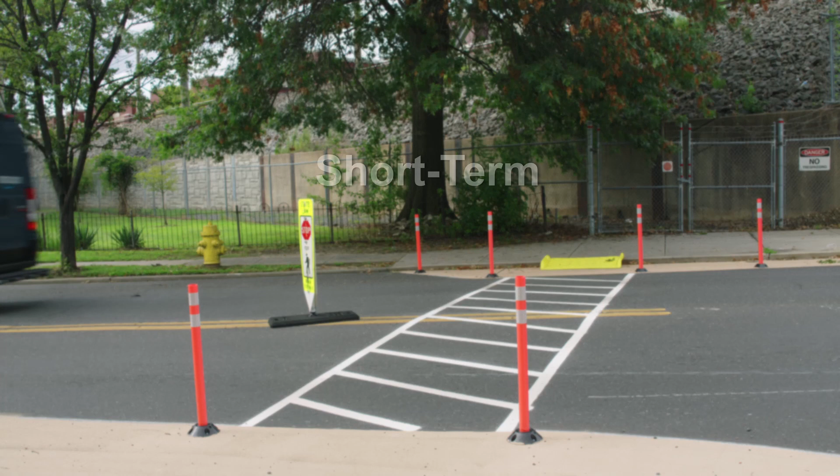In New Jersey, improving safety on our roadways is a top priority. To help reach safety goals, communities all over the state have been implementing temporary demonstration projects. Demonstration projects are short-term, low-cost, temporary solutions to reimagine roadway and other public spaces to improve safety and quality of life for all users. They're a way to involve and engage the public in the road design process as a way of gaining support through open dialogue. Demonstration projects, which are also referred to as tactical urbanism, pop-up projects, or quick build projects, allow public agencies, community partners, residents, and visitors to test and implement a shared vision for improving public spaces. This try it before you buy it approach is low risk and allows organizers and communities to test assumptions and refine designs before committing to permanent changes or large financial investments.

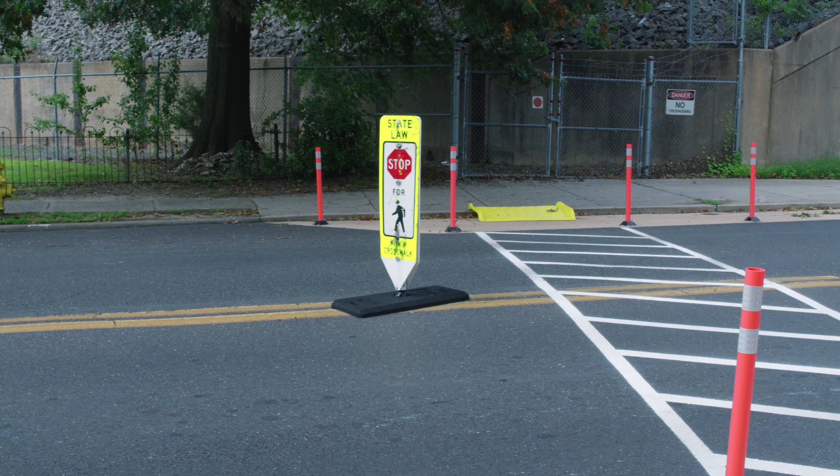Some examples of demonstration projects you may see around New Jersey include temporary bike lanes, pop-up parks and seating, curb extensions, street murals and decorative crosswalks, open street events, and other innovative ideas. Projects are generally quick, flexible, scalable, adaptable, and inexpensive. With permissions in place, a pop-up bike lane can be installed in a day for the cost of a few cans of temporary paint and the help of some volunteers. Projects can include artistic elements to improve appearance and enhance visibility. Once a demonstration project is installed, it can be evaluated for potential impacts on people's behavior and comfort levels, economic impacts, impacts on traffic flow, and changes to roadway speeds. Short-term and low-cost demonstration projects provide the opportunity to capture real-world data for streets and public spaces and encourage people to work together in new ways, strengthening relationships between residents, nonprofits, local businesses, and government agencies.

Road design projects are inherently long-term and costly. A temporary demonstration project provides an opportunity to test a design with low-cost materials while bringing government leaders and community members together to demonstrate that little investment can make a big impact. Keep an eye out in your neighborhood, not only for temporary demonstration projects, but areas that might benefit from them. To start a conversation about demonstration projects, reach out to your municipality to talk about what's possible. For more information and for resources that can help you get started, please contact the New Jersey Safe Routes Resource Center.

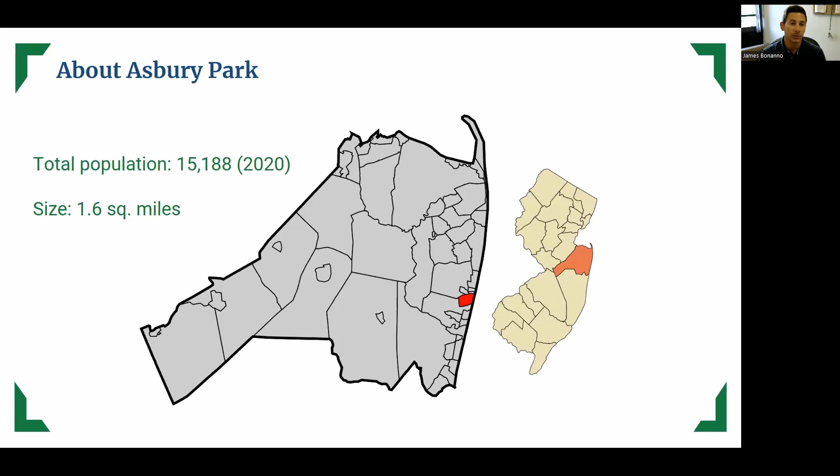We have a large bicycle network and bicycle community, people that ride to the beach, around the city, to downtown, to the waterfront, to their homes, their rentals. And we've also seen a big uptick in our new micromobility program. We recently launched a scooter share program. Next slide. So we launched Superpedestrian Link in May 2021. We have about 250 e-scooters in the city at a time; we kind of go down in the winter. And we have just over 50 geofenced parking corrals located at nearly every intersection in the city. We average around 21,000 trips per month in summer 2022.

So as you can see, on top of the bike trips, we're seeing even more scooter trips and pedestrians and cars coming around. So we have a lot of road users sharing the space and navigating it together. And in the past, we've had to kind of develop new ways for them to interact and be safe around each other. Next slide.

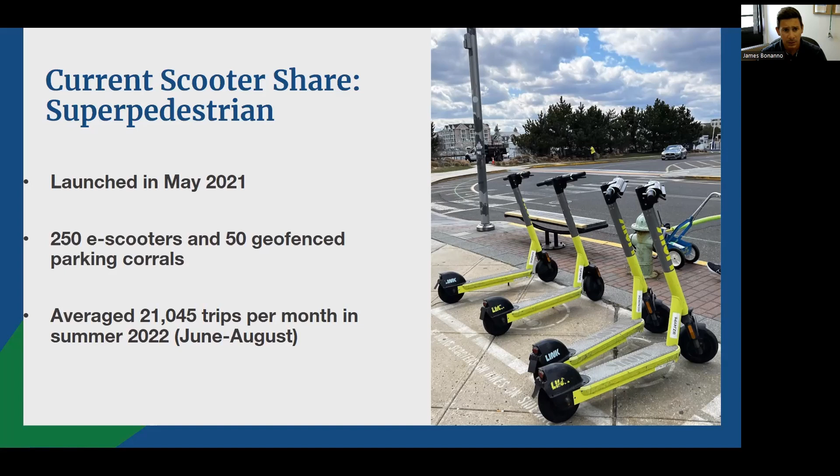So in 2018, the city adopted the walking and biking master plan. This was a master plan looking at the entire city, how we can improve pedestrian infrastructure, biking infrastructure, as well as keeping everybody safe around vehicles and everything. It highlighted a lot of the city's most popular cycling destinations and routes.

You can see in our map here where our central business district is and where our waterfront is, and those red areas are all the areas that people are just congregating around. But one of the biggest things it did, it also identified some difficult or dangerous sections of roadway that we kind of needed to improve on. Next slide.

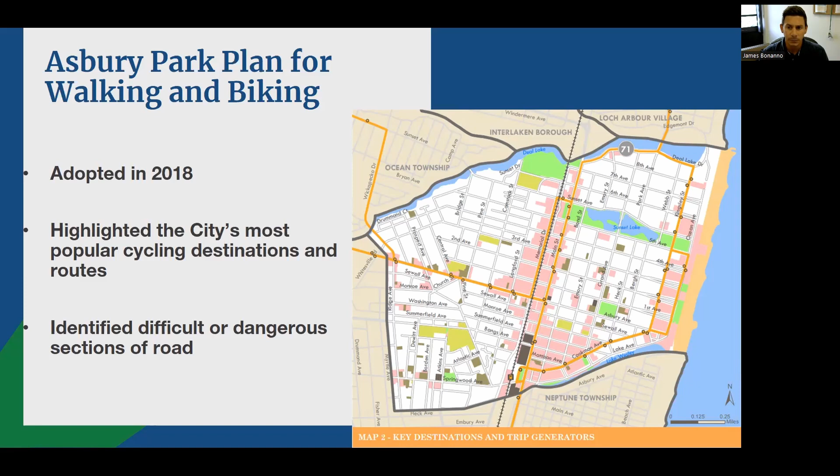So one of those areas was the intersection of Cookman Avenue and Asbury Avenue and Kingsley Street. So while going through this project, we realized that Ocean Avenue, Kingsley Street, Cookman Avenue, Asbury Avenue, they're all involved in this intersection, and they all had about a moderate level of stress analysis. It's stressful for bicycles to ride this intersection. It's not the most easy one to navigate, and there are a lot of vehicles.

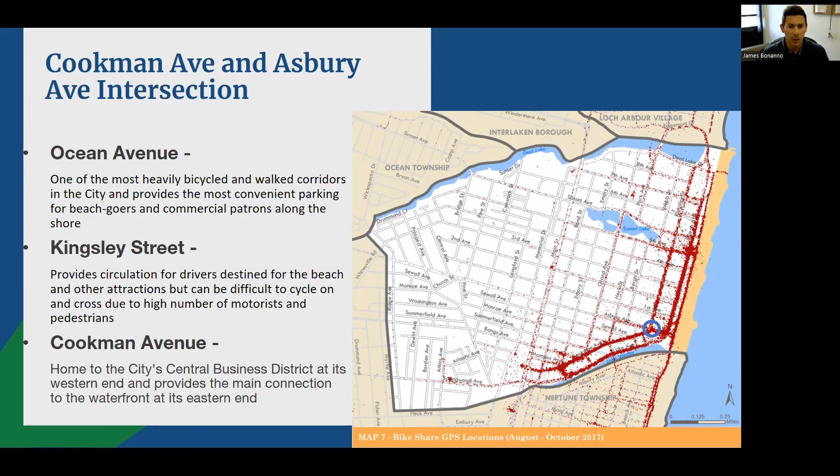It does connect our central business district, which is located along Cookman Avenue, west of this intersection, with Ocean Avenue, our waterfront on the east side of this intersection. It is the main connection between our downtown and our waterfront, our two biggest draws for the city. You can go to the next slide.

The intersection itself has some geometric complications. If you look at the approach from Cookman Avenue to the intersection coming from the west side, it gets wide, and a lot of vehicles treat it as there's two travel lanes when there really is only one.

We have sharrows, we have some bicycle infrastructure in place, we have bike lanes along Kingsley and along Asbury Avenue, but we also have pedestrian bump outs that, while they make great crossing for pedestrians, tighten the roadway a little bit and kind of make it difficult for the bicycles and vehicles to navigate the intersection together. So while our walking master plan made some recommendations for this area and for these roadways, it didn't give any clear direction to this intersection.

And while looking at our plan and developing it and going through with our recommendations, we took a step back to say, maybe there's something more we could do with bicycle infrastructure to really improve this intersection. Maybe there's ways we can, instead of redesigning the entire thing, add something specific in that might change the way people act or see other modes of transportation and how they use them.

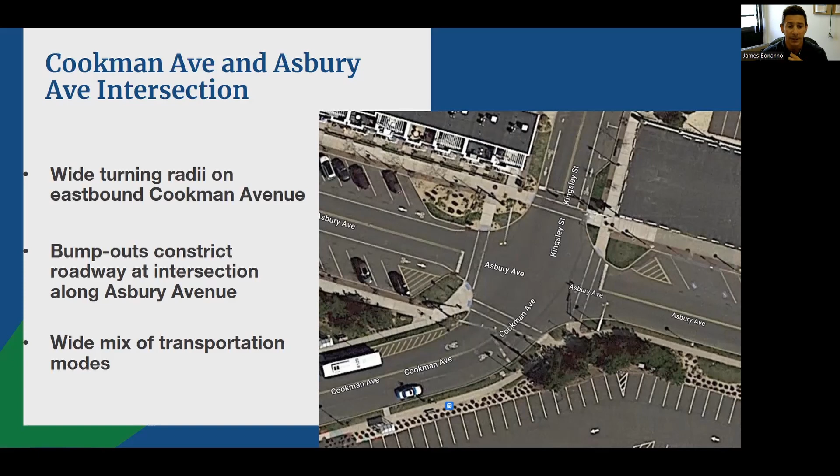Next slide. So we had a plan, we'll wait to kind of talk about that, but the biggest first step of going through with this was kind of building support. We didn't want to do anything too permanent because we knew how people saw this area. People kind of viewed this intersection as cars. If you do anything, it's going to back up. If you do anything, it's going to create traffic jams. So we couldn't do anything permanent.

We had to start somewhere small, and we started by enlisting some allies. We had Rutgers. So we had the studio class on the side that wanted to do a project, and we said, this pop-up bike lane idea might be good. Maybe we can do some pop-up infrastructure.

So we also had allies on our city council, in our building itself, people that we knew would be on our side and help us portray this project in a good light. Because a lot of these projects, people see them as detrimental or problems, that it's going to affect the way they drive. And yes, but not in a negative way.

A big part of building support is defining the problem and the goal. We spent some time really defining the intersection, defining what the problems were, and kind of discussing what our lasting solution was hoping to be, what our goal was. We used pictures and maps and everything to clearly explain our project and show what we were proposing.

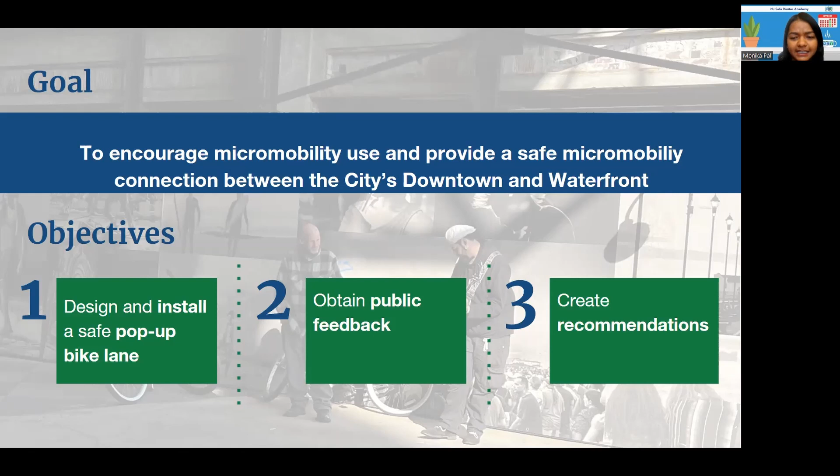The studio team consisted of first and second year graduate students from the Edward J. Bloustein School of Planning and Public Policy at Rutgers University. The members of the team brought knowledge and expertise from various academic and professional backgrounds. While the impact of the COVID-19 pandemic was easing through the duration of the project, the studio's team was still able to meet with clients and stakeholders through a virtual setting. Next slide.

So why do we do a demonstration project? In simple words, to see if it works. The studio team and the city worked together to select portions of Asbury and Cookman avenues for the demonstration project in order to help show what safer connectivity between these 2 popular destinations can look like with enhanced designs focused on walking, bicycling, and micromobility. The studio team and the city were confident that the selected segments of Asbury and Cookman avenues have the space necessary to better accommodate bikes as well as e-scooters.

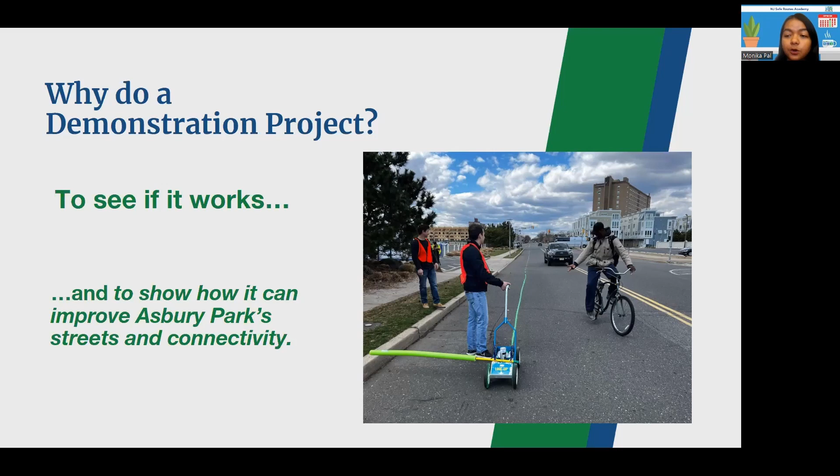And we were very excited to use this as an opportunity to allow the community to see and experience how some very simple changes can improve conditions for bike and e-scooter riders without even impeding the flow of traffic. Next slide. This map shows the final bike lane proposal. After several discussions and feedback, the final plan was developed to implement a bike and scooter lane along both sides of Cookman Ave, starting from St. James Place, and along the southern side of Asbury Ave, ending at Ocean Ave. The final plan also included a protected intersection treatment at the Cookman Ave and Asbury Ave intersection. Next slide.

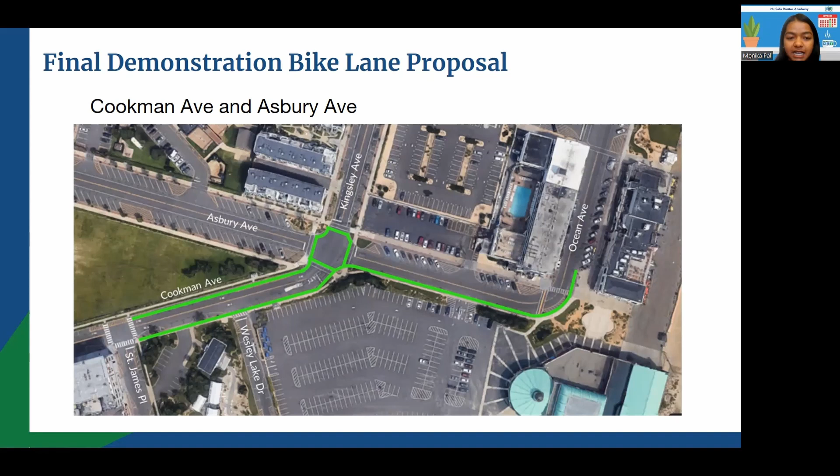Cookman Ave currently has no bike lanes, and it has parallel parking spots on both sides of the street. There were also 2 NJ Transit bus stops on both sides of the street. So in our proposal, we removed the parking spots to fully utilize the parking lane on both sides of the street to accommodate a 5 foot wide bike lane with a 3 foot wide buffer with traffic cones. The travel lanes remain the same under the proposal. We didn't touch the travel lanes. We used the Streetmix website to generate the existing and proposed cross-section. And this website is easy to use and is free. Next slide.

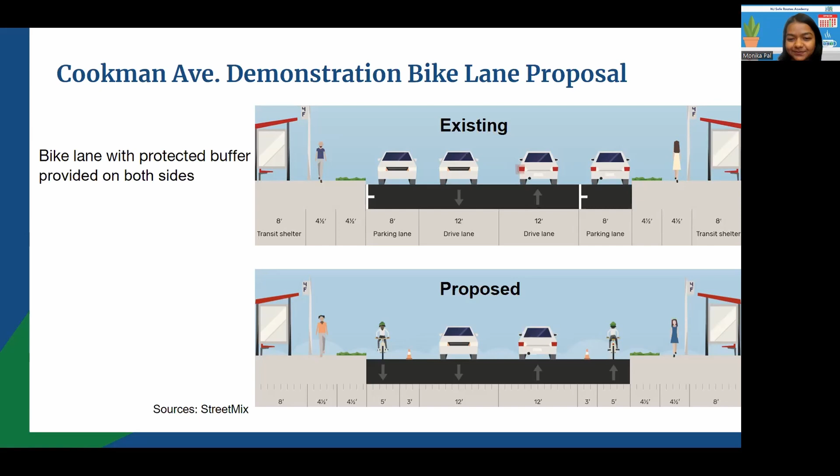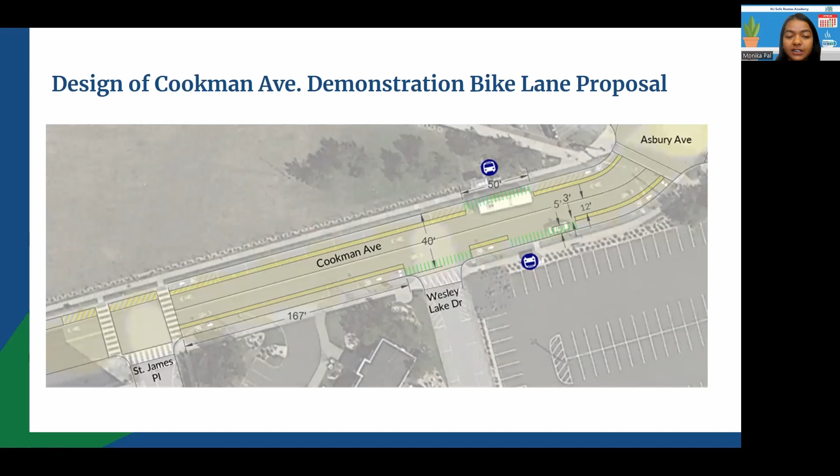This is an overhead view of the design of the demonstration bike lane proposal along Cookman Ave, which we prepared using AutoCAD software. Next slide. For the bus stops at Cookman Ave, we needed to ensure ADA compliance. The NJT buses need to be able to stop against the curb to accommodate wheelchair users. To accommodate these needs, the design called for traffic cones in the buffer to not be placed within proximity of the bus stops to allow enough space for the bus to stop and reach the curb. Next slide.

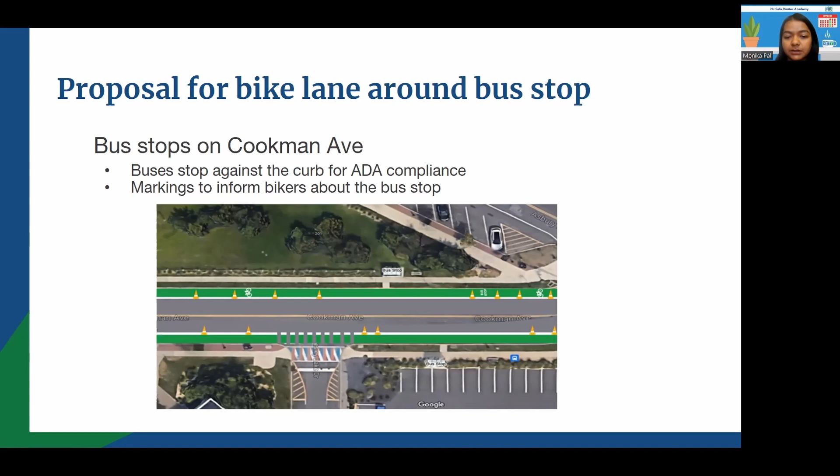Moving on to the intersection, our proposal also focused on enhancing safety for people on foot, bicycle, and scooters at the intersection of Cookman Ave, Asbury Ave, and Kingsley Street. Some of the intersection corners have larger turning radii, which can be made to feel safer by tightening the radius so drivers do not round the corner very speedily. Therefore, for the intersection, the studio team proposed a corner island on the Cookman Ave to Asbury Ave right turn, and also on the Asbury Ave to Kingsley Street right turn to discourage sweeping turns and in order to lower the turning vehicle speeds. The corner island also created a setback between the motor vehicle traffic and the riders in the bike and scooter lane.

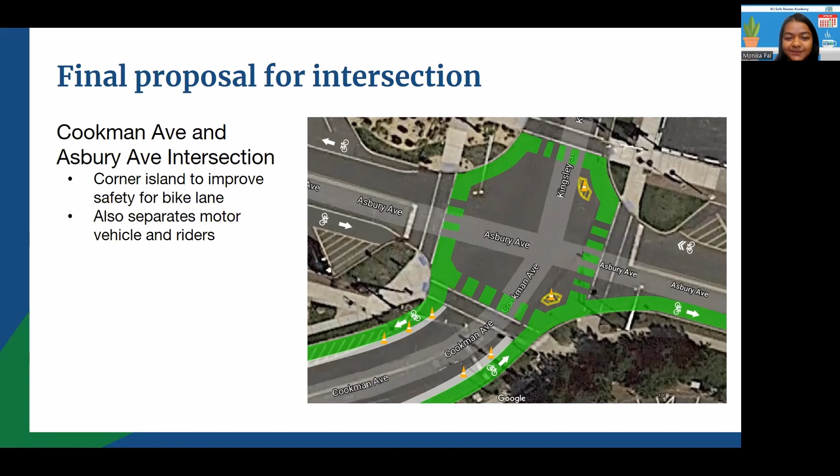The intersection design also featured a protected intersection, which sets the bike lane apart from motor vehicle traffic and did not force bike users to merge into mixed traffic. Instead, they were given a dedicated path through the intersection. Next slide. This is the detailed design of the proposal for the intersection, which we again prepared in AutoCAD software. Next slide.

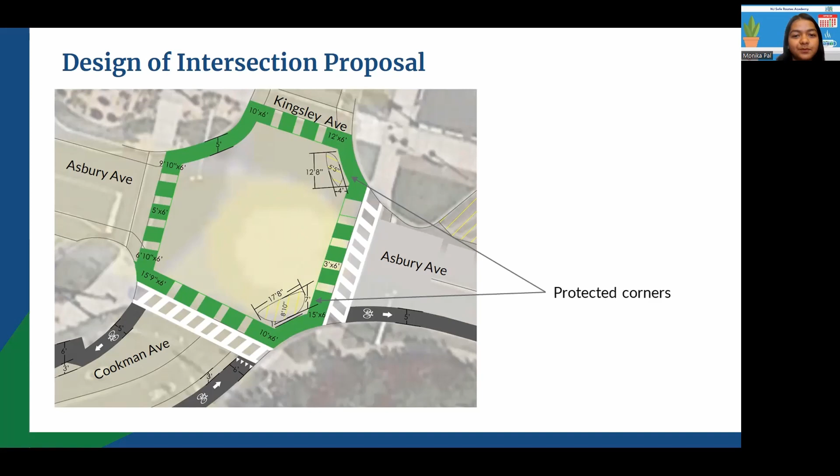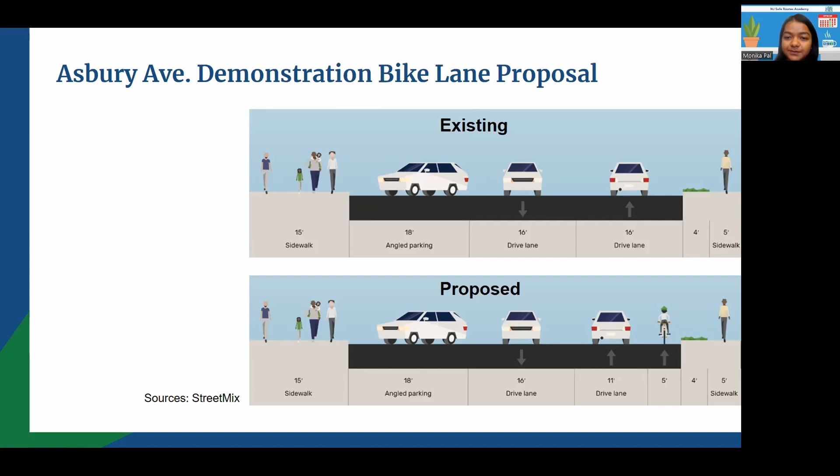Coming on to Asbury Ave. Asbury Ave is a popular parking area for beachgoers because it is so close to the boardwalk and the beach. While Asbury Avenue is wide enough to accommodate two 5-foot bike lanes on both sides, doing so would have required adjusting pavement markings for either the center line or the existing parking. To avoid those complications in a demonstration project, the proposal called for inclusion of only one bike and scooter lane on the eastbound lane of the street heading toward Ocean Ave. Next slide. As you can see in this overview shot, narrowing the eastbound lane to 11 feet allowed for a 5-foot bike and scooter lane while maintaining the center line's current position. Next slide.

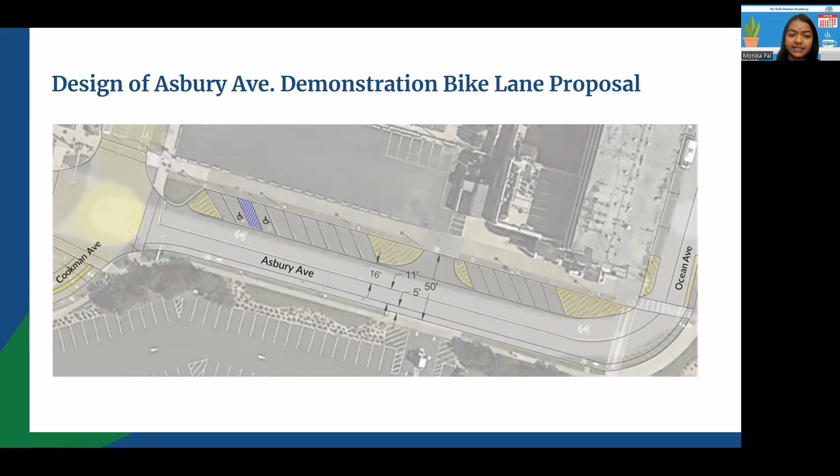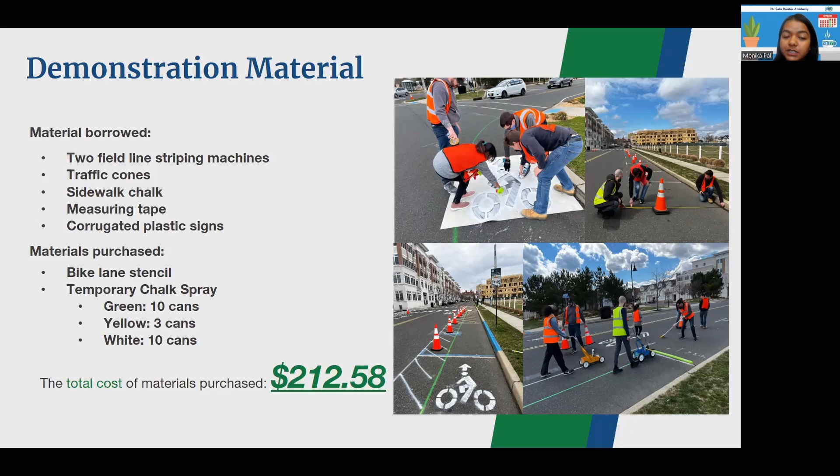Implementing our design required some materials and equipment as well. We were able to borrow field line striping machines, orange cones, plastic delineators, and corrugated plastic signs from the city and our project partners. The materials which we purchased included a sheet of vinyl flooring to cut out our own bike lane stencil and cans of temporary chalk spray in green, yellow, and white. The total installation expenses for the materials purchased were only $212.58. Next slide. The bike lane was finally launched on Friday, April 1st, 2022. Next slide.

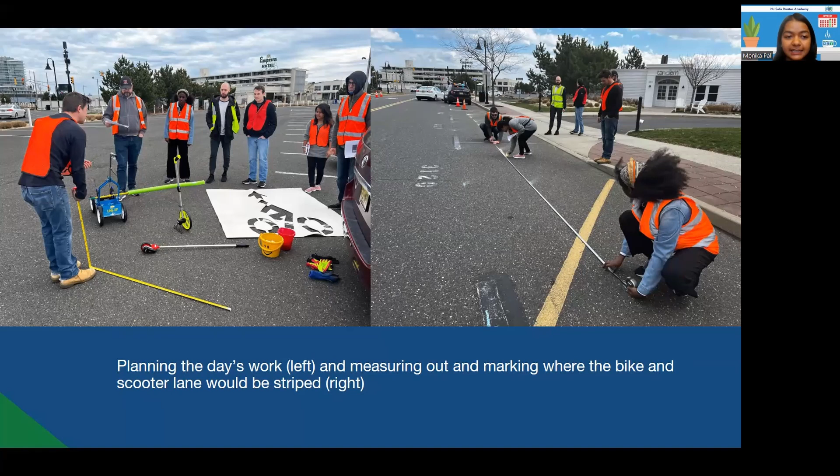First, the team marked the streets with chalk and used tape measures for consistent lanes. Next slide. After setting up the guiding lines, the team spray chalk painted the bike and scooter lane using field line paint stripers. The green paint was used to delineate the extent of the bike and scooter lane itself, and white paint was used to mark 3-foot buffer lanes. We used yellow paint for corner islands on the intersection. Next slide.

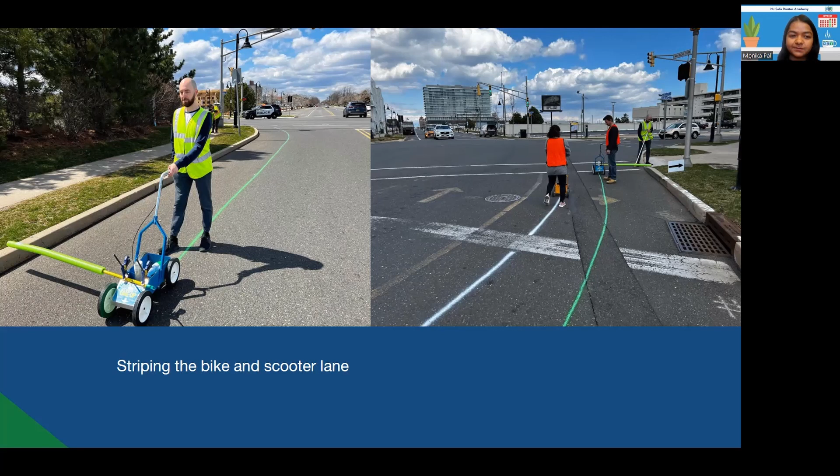We also used white chalk paint to add bike lane markings to the bicycle and scooter lanes in order to add a visual reminder that the lane is meant for cyclist and scooter use. The stencil we used was roughly 5 feet by 4 feet in size and cut from a piece of vinyl flooring. As seen above, portions of the buffer utilized orange traffic cones to add another dimension of safety. Next slide.

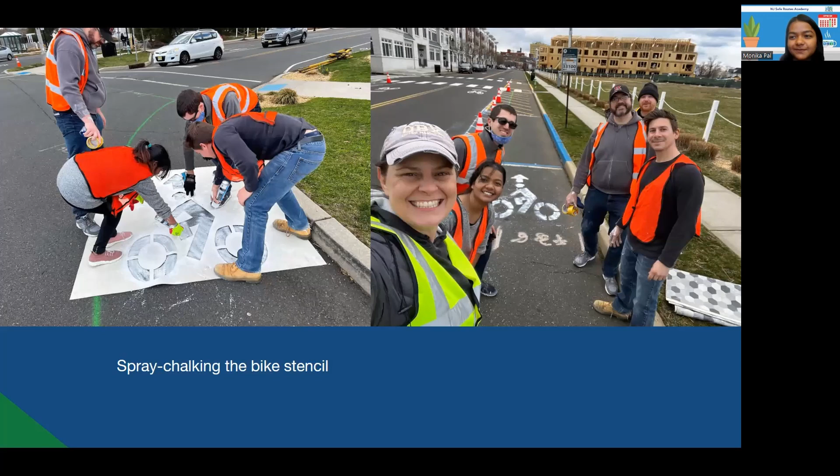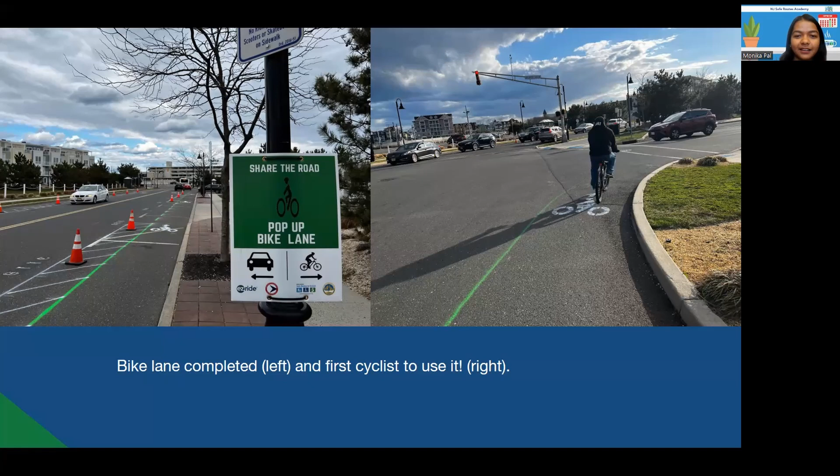Post-installation, the team hung flyers on bus stops, advertising the bike lane and encouraging people to take the online survey. We were also able to borrow and post these pop-up bike lane signs from EZ Ride TMA. We observed a couple of bicyclists using the bike lanes immediately after they had been sprayed. Next slide. Once the bike lane was installed, we gathered some feedback from the bike users. Next slide. The survey questions were developed between the studio team and the research experts at Rutgers. Questions were designed to gain information about the public's experience using the pop-up bike lane and the use of bikes and e-scooters in Asbury Park more generally. Next slide.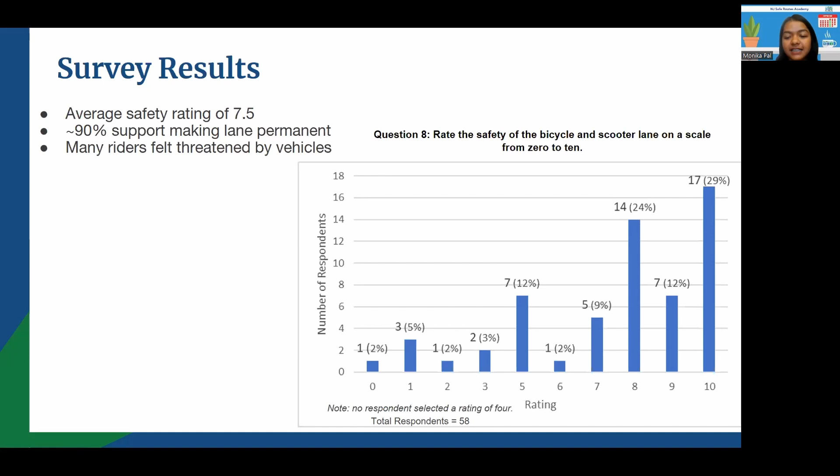At the end of the survey, the participants were able to leave open-ended comments. Out of 35 respondents, 24 gave statements of support for making the bike lane permanent, expanding bike lanes across entire Asbury Park, or for improving bicycle and scooter infrastructure in general. Next slide.

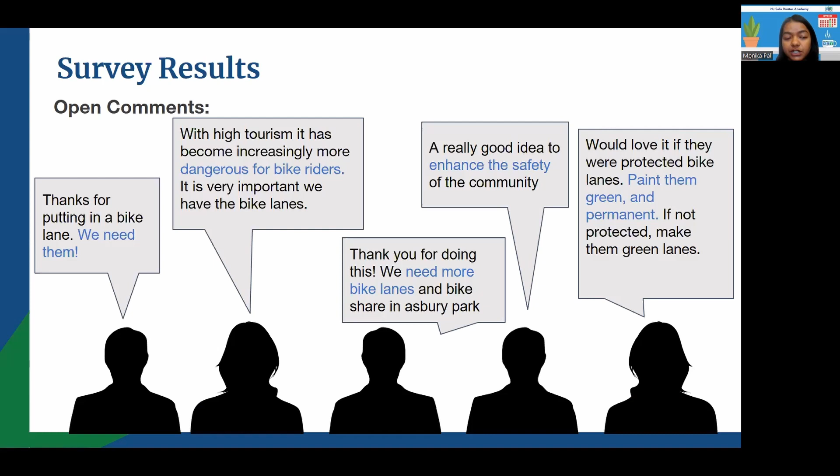Some respondents felt that the bike and scooter lane would have an overall positive impact on the city and tourism as a whole, and that they will enhance the safety of Asbury Park.

Next slide. And I really want to thank James for supporting us throughout the studio presentation and studio duration, without whom this project wouldn't be possible. So I will turn the presentation back to James now for the lessons learned. Thank you, Monika. You go to the next slide.

So during this whole process, this was new to kind of all of us. It was definitely my first pop-up bike lane or anything kind of temporary like this. And there's definitely some things we learned along the way. I mean, for one, you have to be flexible in your planning. Things are going to change.

We originally had plans for a whole protected bike lane down Ocean Avenue. And, you know, it was kind of viewed negatively, and we were asked to remove it. And it actually turned out better because we definitely would not have had time to paint that whole thing. This took a whole day to paint already, and all that extra work would have been lost, or it would have negatively affected what we had done.

Definitely alert all affected parties, residents nearby, police, DPW, advocates, whoever you can think of, just so that they understand the project. We had some confusion about whether you could or could not park in the areas where we were removing parking for this time period. So we dealt with it and we talked people through, but it would have been easier had we reached out ahead of time and got in front of that.

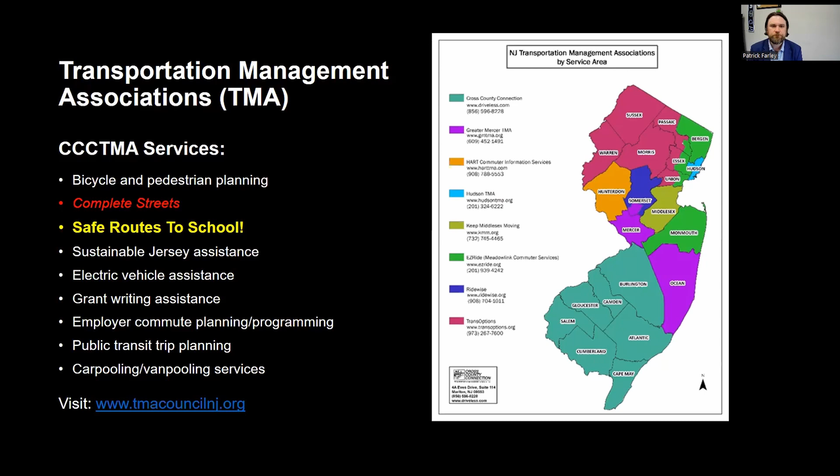So for this project, DVRPC put out a study in 2019 that was discussing parking at PATCO stations. If you're familiar with Collingswood, it's a fairly small borough. It's built before the Highway Act. It's not really suburban sprawl. It's more traditional development. So it's not a large town. Very walkable. It's really well known for its walkable downtown. But they were finding that almost a quarter of the vehicles that were parked at the station were from residences within a half mile. That's a 10-minute walk.

So we thought, what can we do to encourage more people to bike and walk to the station? Also, we found that there was a fairly high number of bicycle pedestrian crashes. So there are safety concerns, and it's a priority to test things that could improve that. Also, Collingswood and their neighboring town of Haddon Township did a joint bicycle pedestrian master plan. And these streets that were the focus were included in that master plan, and were identified as priority streets by the public during the outreach process.

So the goals were to encourage biking and walking, get that number of people parking down, educate people on why these projects are important, but also why walking and biking is important, the benefits of it. And then building support for safer streets throughout the community. We figured if people can test it, people see it, maybe they'll buy into the types of facilities being tested, and that's an opportunity to do more. Next slide.

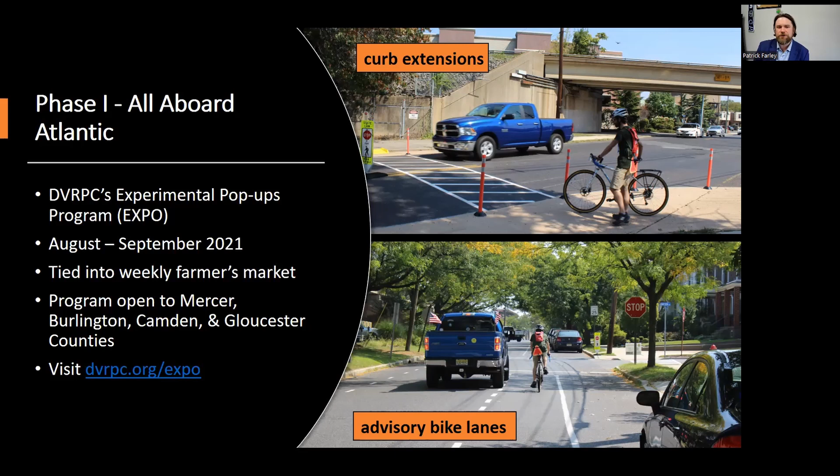If you are interested in DVRPC's Expo program, if you're within the DVRPC region in New Jersey, which consists of Mercer, Burlington, Camden, and Gloucester counties, feel free to reach out to them. I can also put you in contact with them. They are always looking for candidates to participate in this program. That is the link to their website. If these slides are shared, you can use that to get to that website. Next slide, please.

So phase 2 was a project largely led by us at Cross County Connection TMA. As I mentioned, this was supported through funding from DVRPC. This project ran in the spring. Spring is a fine time to do these kinds of projects, but you might want to do it later in spring, because I will say that April was an extremely difficult time to construct some of these projects. We were receiving, for about 2 weeks, a substantial amount of rain that really delayed everything and made public events difficult. So that's just another lesson learned: really think about weather.

So since it was funded through a program, TOP, but it's funded through something called Congestion Mitigation and Air Quality, that is efforts to reduce congestion and improve air quality. It's pretty much what the title says. So it had to include something that was really targeted at public transportation. So we did a pretty large education and promotional campaign centered on the local PATCO stops that were near the project.

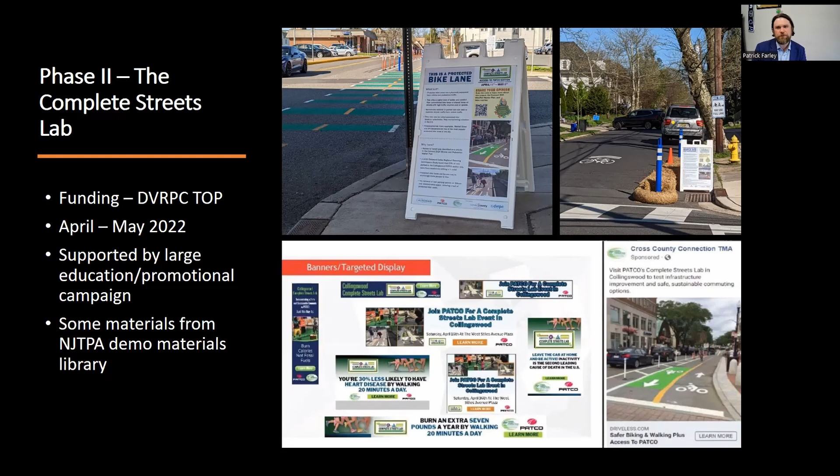One of them involved something called a targeted social media campaign, actually this is a web campaign, sorry. If they were going through the station, and when you're on your cell phone, you might see pop-up ads. Well, these would be ads that were popping up as people were reading the news and things like that, educating on the benefits of biking and walking, but also details about the project. We also were able to keep costs low, one, by purchasing cheaper materials when we needed them, but also there was support from NJTPA, where Keith, who will be speaking later, is, in lending us some materials. Next slide, please.

So I mentioned this was a large project. You don't necessarily have to do a project this scale to be successful. It involved a series of streets that were immediately surrounding the station. It tested a wide variety of different applications. So this was a big project. It was a big undertaking. That's why it was really like a year-long type of project. Next slide, please.

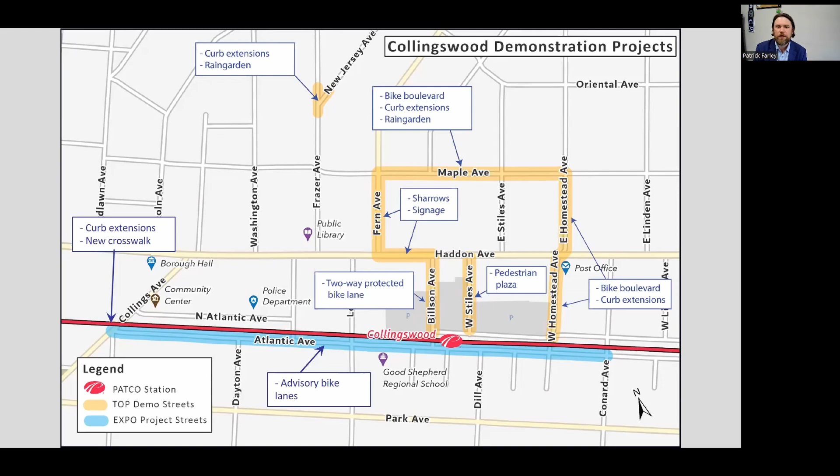So one of the aspects we tested was Maple Avenue, a street that parallels Haddon Avenue, which functions as the main street. It is a county road. It has a lot of traffic, and its limited width makes it hard to accommodate bike lanes. So one of the ideas in the master plan was to create some form of bikeway on Maple Avenue. So what we found was maybe an appropriate treatment was doing a bike boulevard. And this bike boulevard is a concept that the borough wanted to take a look at because they're considering applying for grant funding to do something more permanent.

So what we did here was, you mentioned there were bump outs mentioned, which is a pedestrian safety feature. It's used to narrow roadways to slow traffic. This was already a pretty narrow road, but the curb extension served sort of a different purpose. People were parking extremely close to the crosswalks, which causes visibility issues for pedestrians and bicyclists using the streets. So we use these to keep people away from the intersection.

They were also a really good opportunity to create gateway treatments, to signal drivers, hey, you're entering a bit of a different environment. We use signage and pavement markings along with that to educate people, like, cyclists will be here. They have a right to be here. They'll be using the full lane. So, drive slowly accordingly. Next slide.

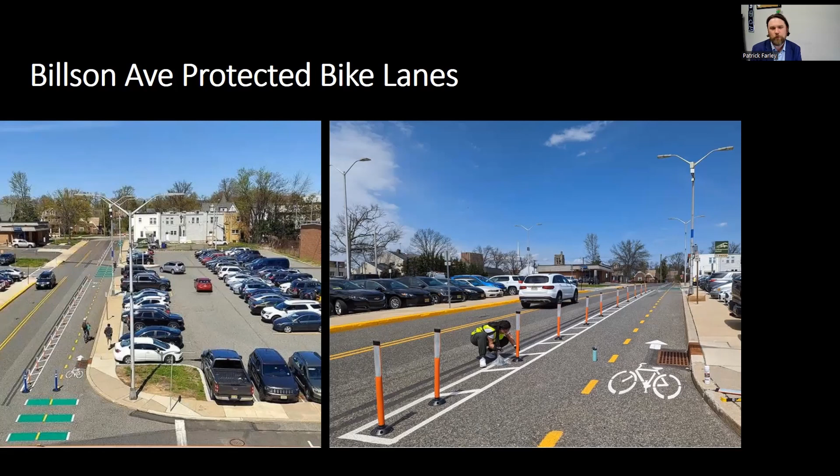That's our staff out there installing it. It was a really fun experience, and just a great way to get staff on board in a fun project. Next slide, please.

As I mentioned, we tied this into a larger marketing and education campaign. So in areas within close proximity and along the streets that were involved in the project, we posted educational signs, promoting why it's really important to walk and bike. These were focused on the health benefits and environmental impacts.

And also we used them to educate that the station's not as far as you think it is. And also it's a great way to save money, because at this time we were approaching the highest gas prices, almost $6 a gallon last spring. So we used that as an opportunity to show that you can save a decent amount of money if you're limiting like 2 miles a day, a mile a day. That does add up over the course of a year. Next slide, please.

So another thing that's really important to mention is education. We used A-frame signs to educate people, again, on the purpose of these types of facilities. We also used it to educate them on how to use the facilities. This is extremely important with a treatment like an advisory bike lane, especially because it's not a very familiar concept

in the United States. It is something that is used on narrower streets in Europe, and it has the potential to be a very effective facility, especially in those older towns that don't have those wide residential streets. We call it yield streets, where cars have to maybe tuck behind parked vehicles to let other traffic through.

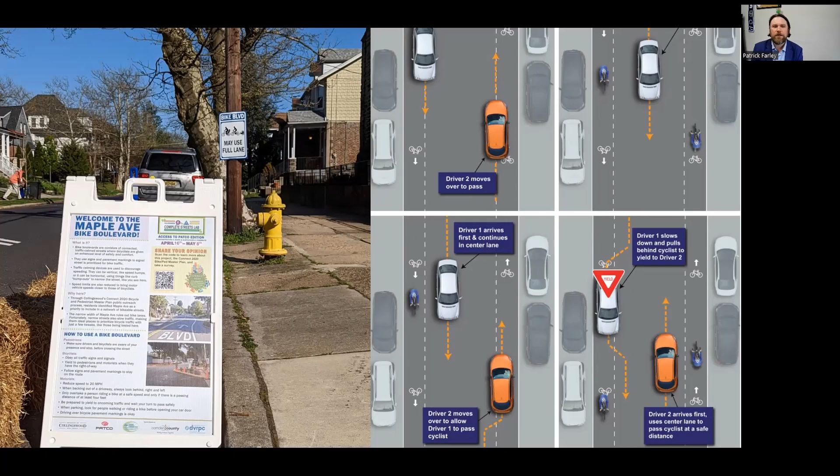And as I mentioned, part of the campaign was educating people on really how close the station is. So up to a mile out, we were posting a lot of signs along these priority streets that were educating them on roughly the equivalent time to walk. So people might not be thinking, oh, that's really a 10-minute walk. If you set aside time in your day and it's a 10-minute walk, you might be more apt to

do that. Also, you could scan that link with your cell phone and it would automatically take you out to Google Maps, populating the destination to the PATCO station. So you click walk or bike and it would tell you exactly the streets to use to get there and the time it would take you. Next slide, please.

This type of project does require a lot of outreach. You can never have too much education and outreach involved with these types of projects. As has been documented in James and Monika's presentation, surveys are extremely important, or some method to assess the success of the project. So we had paper surveys that we used at events. We would go to the PATCO station, hand them out, but we also had tablets on hand at those events where people could do it electronically.

We shared the survey through social media, on the township and borough websites. So we did whatever we could to get as much feedback as possible. Also, the idea of seeking input and adjusting the project as needed is extremely important, and it's good to be flexible and willing to listen to the comments, because really that's the point of these, to test them out, see what works and what doesn't work, and adjust accordingly.

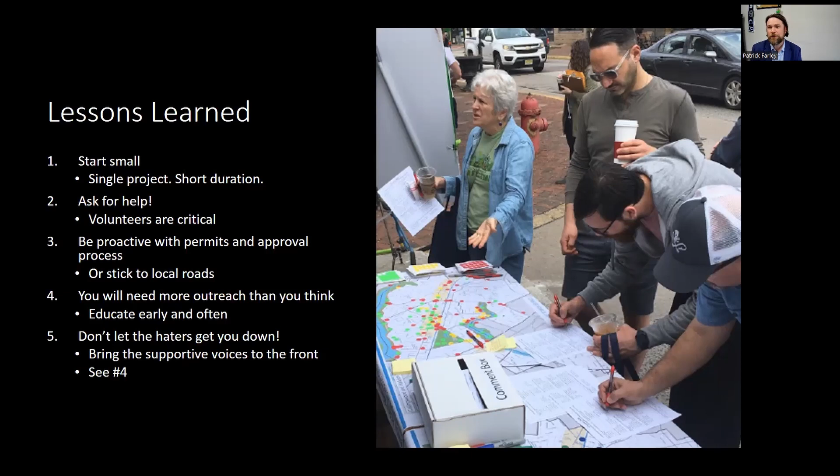And with that, I'm going to hand things off to Keith Hamas from North Jersey Transportation Planning Authority, to talk about their project in Keyport and a few other interesting tidbits about demonstration projects. Thank you, Patrick. That was a really interesting mix of elements to demonstrate the benefits of complete and green streets. That was a nice overlap, and they often do overlap in design and purpose. So I was glad to see that.

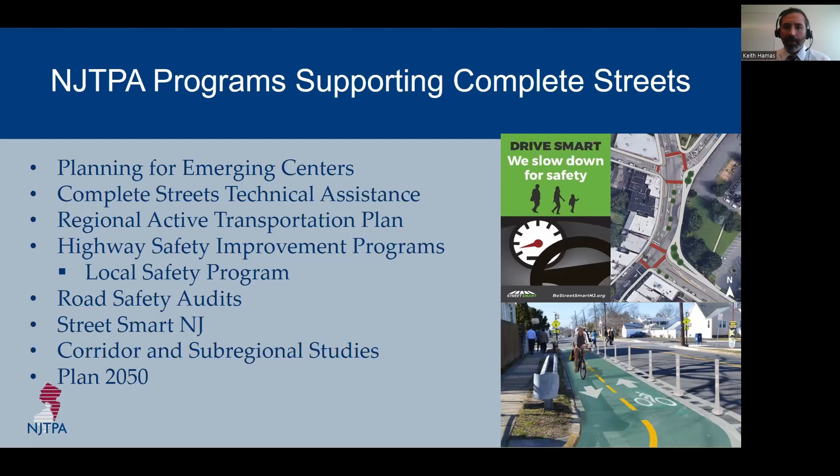So the Keyport Complete Streets Policy and Implementation Plan came out of Keyport applying for the program to address public concerns around safety, especially for walking and biking and getting kids to school safely. So this project included a demonstration project installation as a focal point for public engagement. And I'll talk a little bit more about how that took shape.

The overall goal was to develop a plan that the borough can use for formalizing its commitment to future transportation and land use decision making. So the demonstration project was in this scope as a phase of public engagement and also a way of transitioning from paper to concrete. So before I begin, I just want to quickly acknowledge some of the key players. We had Keyport Borough leadership that was involved in this and really dedicated a lot of time and energy to developing the plan and installing the demonstration project.

I want to also thank the consultant team at FHI for coordinating the development of a set of complete streets resources and recommendations, and also their guidance in designing and installing the project. And I also want to thank Monmouth County Planning and Engineering for their teamwork and really helping authorize a demonstration project on a county roadway. And that was an important piece because it gives a great example of interjurisdictional coordination.

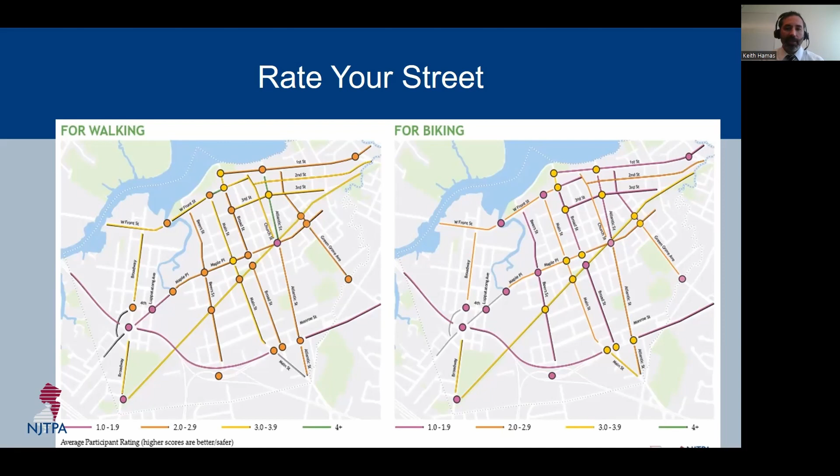And the purpose of this project was to satisfy a few objectives. It was to address a safety need for walking and biking. And we also wanted to set up at a high-profile location to help generate more interest and enthusiasm for people that are walking and biking. The Henry Hudson Trail is a real true regional asset for Monmouth County, and it carries a lot of pedestrians across different municipalities. We also wanted to test a solution that goes above and beyond what you might see as a standard safety treatment. And again, a light, quick, cheap approach. We wanted this to be temporary and reversible.

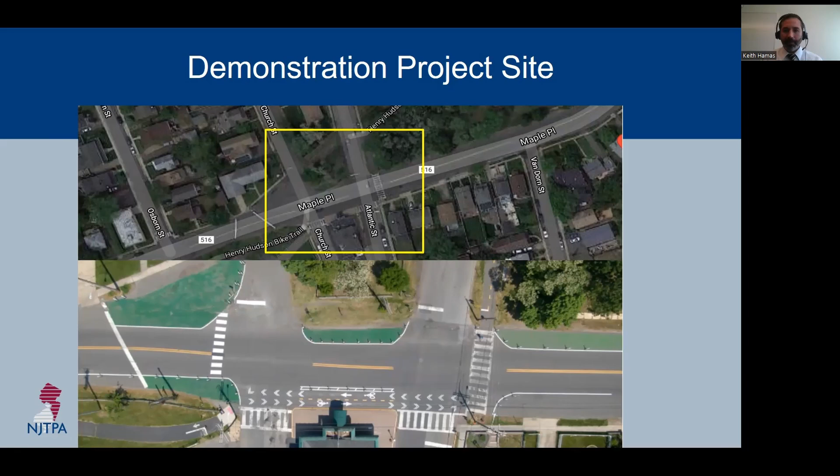Next slide, please. So I'll talk a little bit about who was involved. As I mentioned, Maple Place and the Henry Hudson Trail are both county facilities. This required a fair amount of coordination with the county planners and engineers to address some of the concerns around the design standards. And I'll point out that this was a NACTO-based design. That's a national set of professional engineering standards that specializes in a little bit more of a progressive and adaptable approach for urban streets. And it's not necessarily something that you'd see in the county's engineering toolbox. So we had a few extra meetings to arrive at a design that met everyone's needs, including accommodation for all vehicles like trucks.

So the borough also had a team that they put together to install the project, and the consultants popped in to help guide that installation, but county engineers were also there visiting on site with their safety vests and measuring tape for quality assurance. It was all installed with very minimal disruption to the roadway operations. Next slide, please.

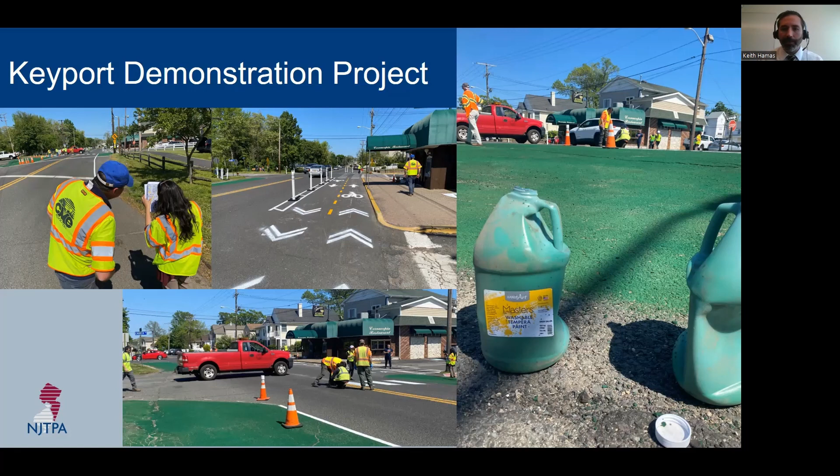So some of the planning details are shown here. You can see that it's a combination of painted curb bump outs, which help to increase visibility, reduce the crossing distances, and narrow the lanes to help calm traffic. There were also some new advance signs for the trail crossing, and there was a two-way bike lane segment at the south side of the intersection to encourage cyclists to cross safely at right angles. This is an example of a NACTO-based design that you wouldn't typically see on a county roadway. Finally, using temporary materials, just plastic delineators and tempera paint, and all that washed away very easily. Next slide, please.

From a planning perspective, this design offered a few safety benefits, and it was very simple, highly functional, and it really helped to align the county with what the borough was trying to achieve for a bike walk network. So as I mentioned, the trail and the roadway itself are both kind of important for Keyport folks getting around, but they're also both county facilities. This is often the case in municipalities. You'll see where road ownership becomes somewhat of a challenge. You might identify an important place for a safety solution, but if you don't own the road segment, it can be a non-starter.

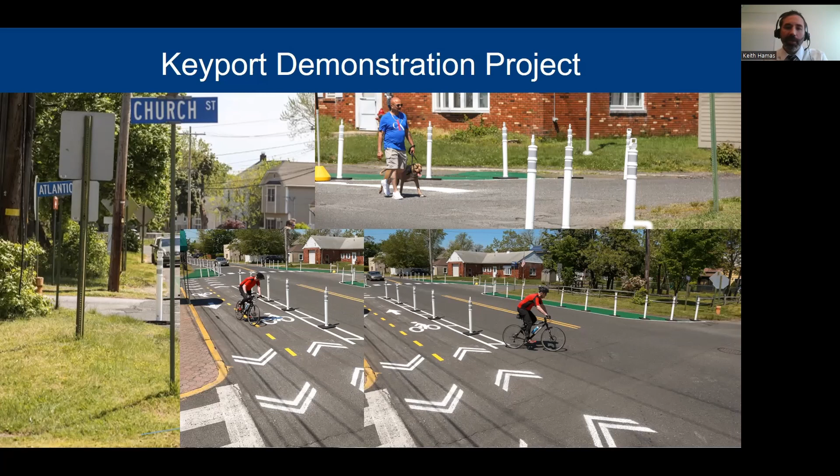But we also found that it wasn't perfect. You can see here some of the cyclists were maybe not following the cycle track and crosswalk as it was intended. So that points to a need for some adjustments and maybe some better directional signage for cyclists from either direction. And with that, I also wanted to echo what James mentioned earlier, that it's important to quantify the results. And that really helps to justify and strengthen applications for more permanent design project funding. Next slide, please.

So the demonstration project is kind of the entry point, and it could be as short as a weekend or longer. And then as you go through these phases, an interim design might last a couple of years and require some more money, sturdier materials, and maybe involve some beautification and artwork as well. And eventually you get to the long-term capital type of project, which is more capital intensive and a permanent design structure.

So the borough now has experience with drafting a demonstration project design, coordinating with the county. They can install and remove these designs and collect feedback. And they also have a list of other potential projects for the future. And I'll also point out that there was a mutual benefit for the county. Monmouth County has an active TAP grant right now to improve multiple Henry Hudson Trail crossings, and this location is included. So now they have a vetted design, it was tested, and they even have some new clarity on how to improve on that.

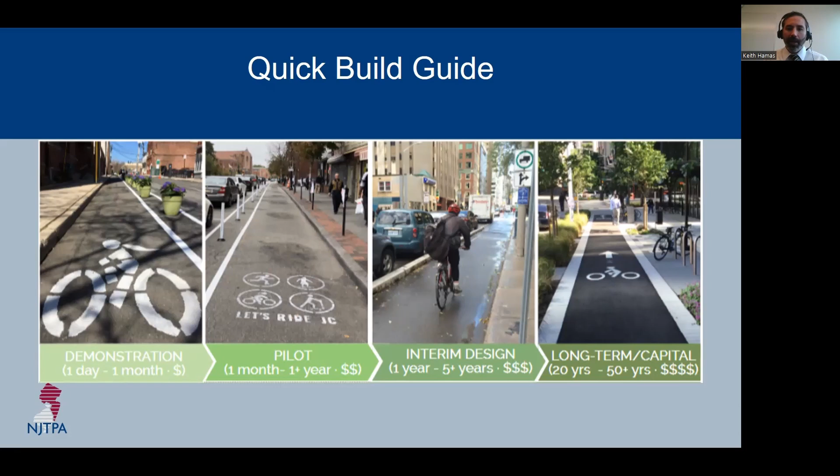Next slide, please. So as we move forward, NJTPA is continuing to encourage this light, quick, cheap approach as part of the planning process. One of the things we have is the Complete Streets Technical Assistance Program, which I mentioned. Now we're planning a demonstration project for the township of Belleville, and it's near a middle school. It should include some treatments such as enhanced crossings and painted curb extensions, and there's going to be art in the intersection as well, and that will involve the school. We're hoping to reinforce traffic calming around that area, designate different school zone drop-offs, and encourage walking and biking to school.

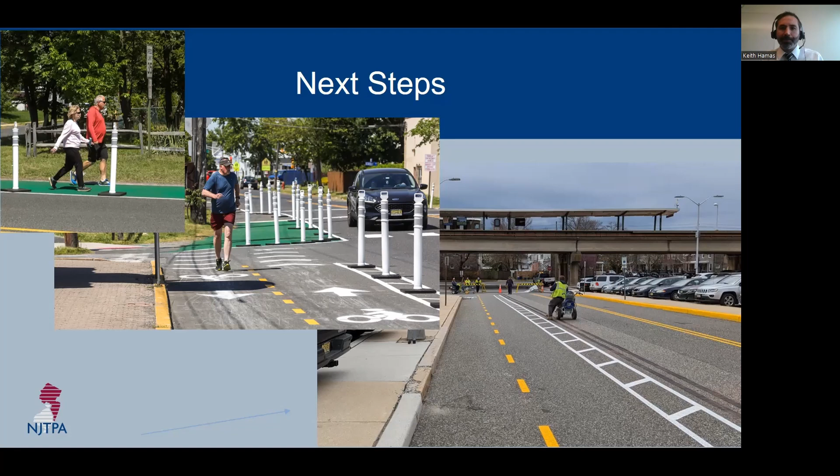We also have a Planning for Emerging Centers program, another round coming down the road. There might be another Complete Streets and Tactical Urbanism project involved in that as well. And I'll share more information about that as it develops. Next slide, please. Another new kind of exciting item that we have in store is NJTPA and the Hudson Transportation Management Association are creating a Complete Streets demonstration library, and that will support broader use of tactical urbanism.

We have a collection of delineators and barricades, traffic signs, stencils, a lot of other different types of materials. They'll be available for loan to communities that want to install a temporary demonstration project. So at this point, eligible borrowers can be from New Jersey municipalities and counties, and with local TMAs as a key partner. So the point of contact must be an official jurisdiction, but there can be other supporting partners as

well. And just to give a quick overview of some important facts on that, this is for materials only. It doesn't include design assistance, and it needs approval by the local jurisdiction or the owner of the roadway for the design. Recipients are also responsible for pickup and transportation and installing it and returning it as well.

So Collingswood, as Patrick was describing earlier, was a first recipient of the library materials, and they were able to use it for a variety of treatments near the PATCO station. Now there are some other potential communities that are in the queue for using these resources. I just want to point out, and consistent with what we saw in Keyport, this lending library is an initiative. It's a way to introduce new bike and pedestrian street design concepts for local officials and for the public, and to help facilitate discussion about the design standards and changes that should be coming.

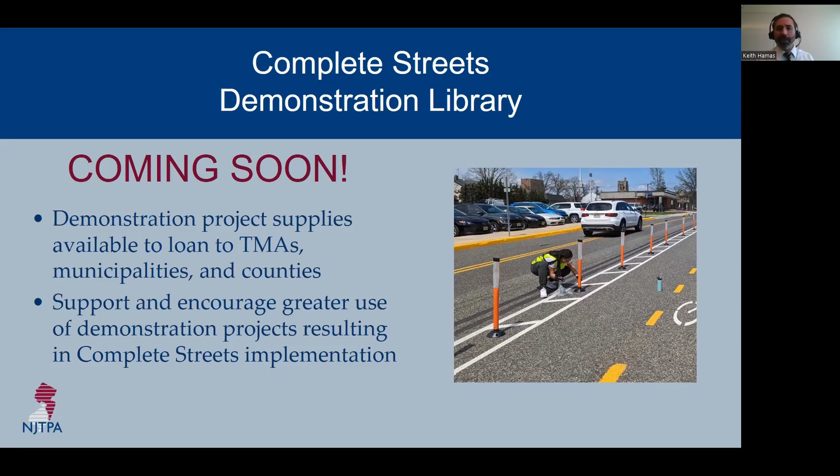Next slide, please. So before I sign off, I wanted to also quickly mention here that we are reiterating really that we have the active transportation plan in progress, and the goal is to develop a safe and practical network for people that want to walk and bike as a means of transportation. And we know there's a lot of work ahead to achieve that vision. So at this point, we're collecting public feedback. It's important to collect good quality feedback through our web map and survey.